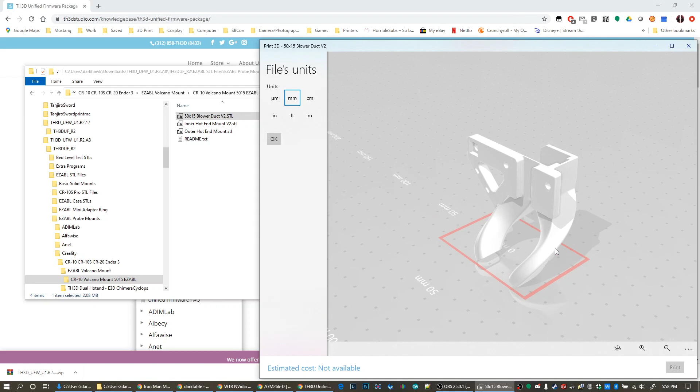So if you extract this and take a look at it, Volcano mount. So here, and I'll just open this up for a second and you'll see. So that should look familiar. That should be the blower duct for it. And you get the idea. So you could print these files out real easily and quickly.

And if you didn't use the Volcano mount and you use the regular mount, there's an OEM mount that's used with the regular 3D printer head for the CR10, or you can use the E3D V6 mount or the E3D V6 clone. So they're there if you wanted to use them.

All right, so now we'll go back to the main folder, open firmware Windows. So here we open up Arduino. Just allow access, it's just the Arduino stuff. So here we are again, we'll maximize it. The print's really big, so I'm going to go to Preferences, change this back down to 14, click OK.

Now we go to Configuration, and we scroll back down to Creality. So CR10S, because that's what I have, so I have an S5, so I uncomment that. If I go to the Volcano mount and uncomment that, so I'm going to leave all those alone, and now I'm just going to scroll down. We have to get past all the printer stuff. So now we're past the printer.

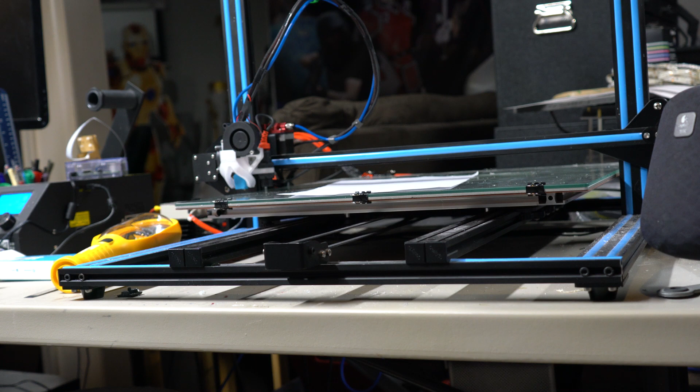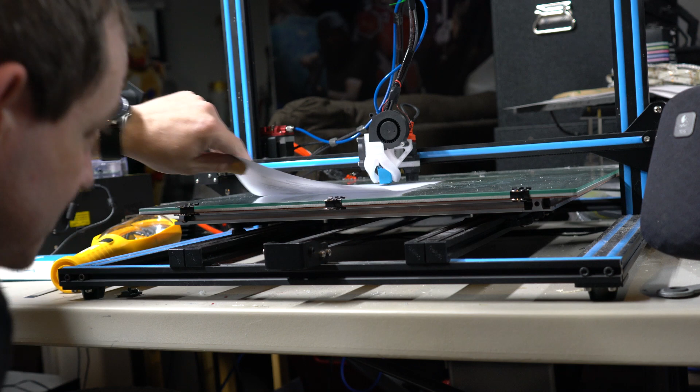Next thing you do, you home the Y. And then home Z. Now what you want to do is the printer, if you look, it says -5 or +5, so it's +5 too high right now, so you want to go down 5 millimeters. So I'm going to adjust it down to be 0. And in this case, my printer isn't really catching, it's not quite set up right. So this should technically be basically catching right on the printer.

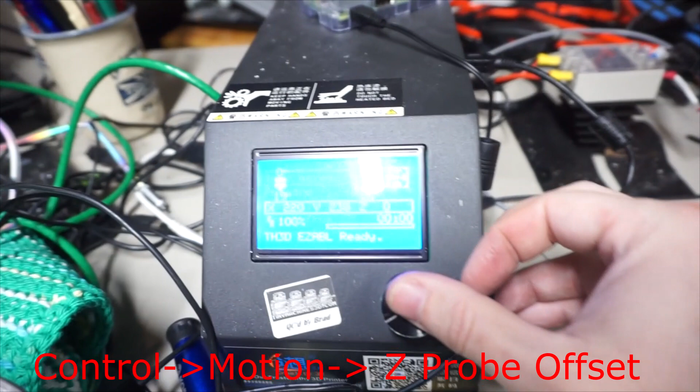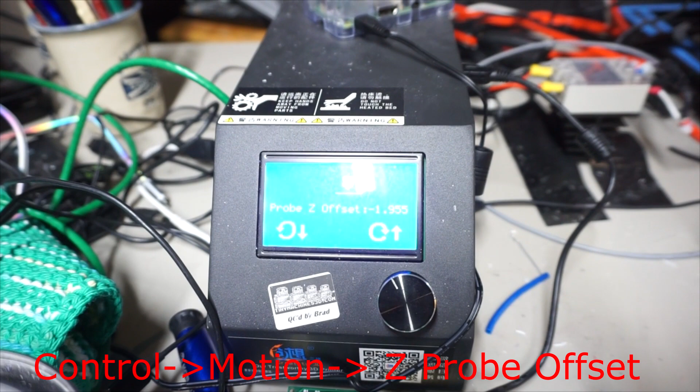So if I go to Control, go down to Motion, go to Z probe offset. Here it's set to minus 1.955. So if I go down just a little bit more, and now if I go over and look at my paper, it's still not catching really, so I'm going to go down just a little bit further. And you can see it's starting to catch. I can feel it. There's a little bit of resistance on the paper.

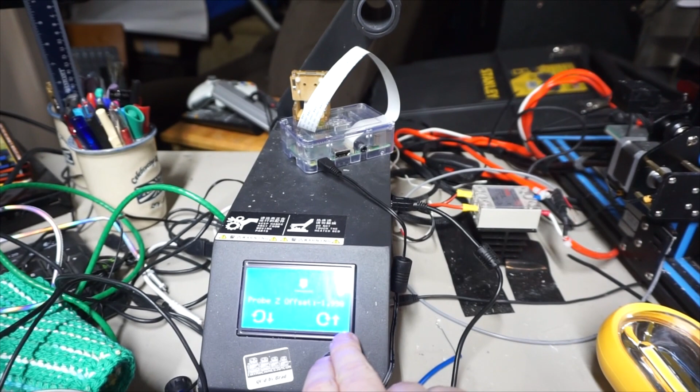So I'm going to just go down one more to make it 2. Hit OK. And then go back up to Control. And then I'm going to go down to Store Settings. So that stores that setting, and it'll remember that it was at minus 2. So I can pull this out now.

And now the next thing I'm going to do, I'm going to send it a command to make it actually do the bed leveling. So I'm going to do G29, and it's going to go through, and you'll see it leveling the bed. So it's going to probe at each one of the places throughout the bed. And remember, I did a 5x5 grid, so it's going to probe 25 places. Each place it probes, it's going to probe it there twice, because one time it's quick, the second time it slows it down a little bit to be more accurate. Now we're halfway through.

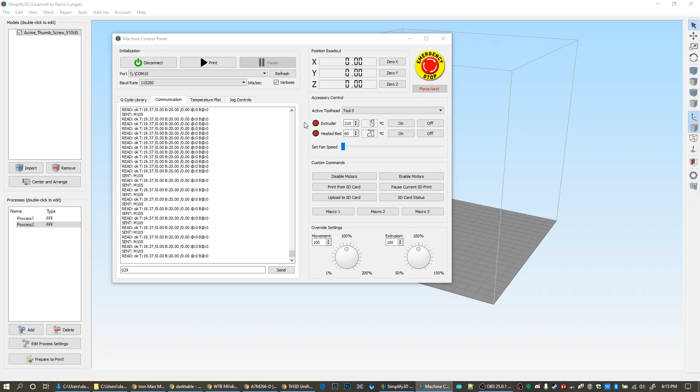So now that it's done, you can see that it went through and it saved what the settings were. So I'm going to copy and paste it into my text file. And then I'm going to go through and delete up to it, and then delete the rest of it. And so now that's my bed leveling. It gives you an idea of exactly how level the bed is. In this case, mine's about 1.5 millimeters difference from one side to the other.

Not incredibly level, but the thing to keep in mind here is that I have solid bed mounts, and I'd rather have solid bed mounts, because for me, I don't want the bed moving back and forth, or changing adjustment while it's running. That's one of the reasons I got rid of the springs, because I just don't like that setup. Anyway, the printer will adjust for how off it is. That's only 1.5 millimeters. Honestly, that's not a whole lot, given the fact that you're talking about a bed that is 500 millimeters by 500 millimeters.

Okay. So at this point, everything's set up and ready to go. You've got the printer set up and ready to go. The only thing you haven't really done is made sure that it heats up and works well from that standpoint. So one way to do that is you can use your software and tell it to heat up. So I turned on the hot end, and it's going to 210 degrees right now. And you can see that the hot end is now going up in temperature.

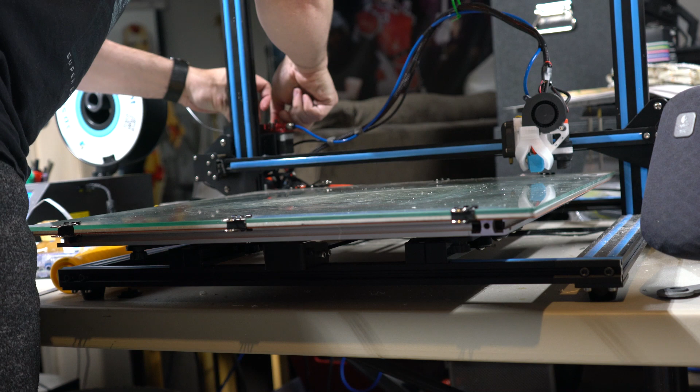Feed that into the printer. It always has problems going into the Bowden tube. I'm gonna feed all this into my printer. Make sure that that is nice and good. My printer is now up at 210 degrees, roughly speaking. Actually, I really need to make that be a little less severe. So, let's see if I can get this to feed in anymore.

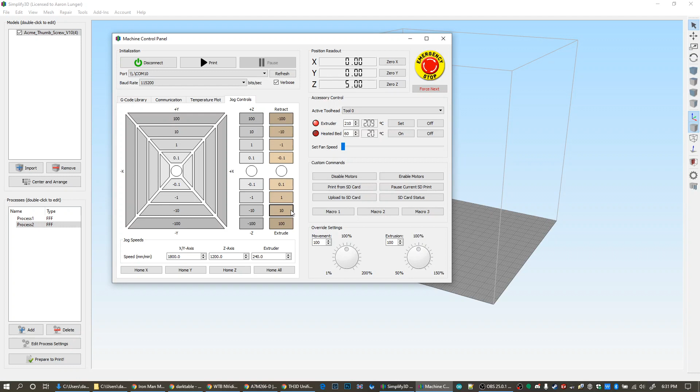I'm gonna actually raise the printer 10 more millimeters. And I'm gonna keep feeding in, and you can see that filament is now coming out of the printer. I'd say that's working fairly well. So I'm gonna turn the hot end off for right this second. And if I look at the temperature plot, you can see that the set temperature went down and the hot end is slowly going to decrease in temperature.

Alright, so I'm going to remove that print and I'm going to go to import another calibration block, and load that in. So the first thing you're also going to want to do is in your software, you're going to want to make sure that, and I'm going to remove that little bit of plastic.

You're going to want to make sure that your software has been updated to recognize that it's now at a 0.8 millimeter nozzle. So you can see here my nozzle diameter is 0.8 millimeters. Ignore the rest of the stuff. This is just the setup that I use. Your settings may be very different.

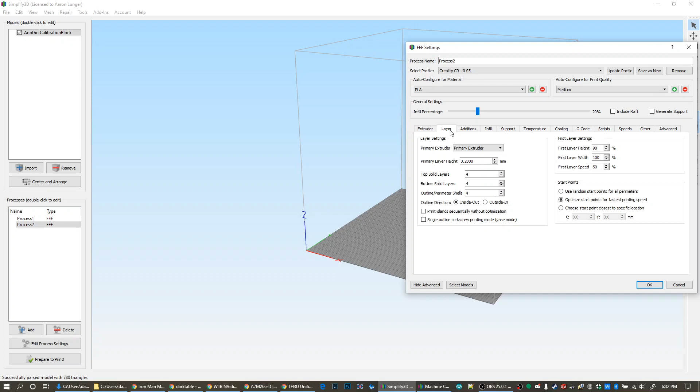Click OK. I'm going to also leave the layer at 0.2, click prepare to print. And it says it's going to take 20 minutes. So I'm going to hit begin printing.

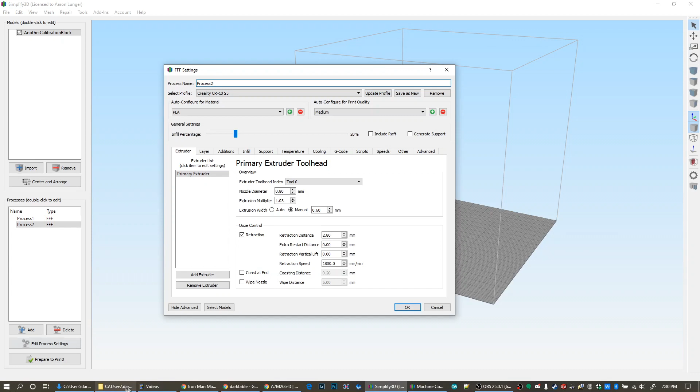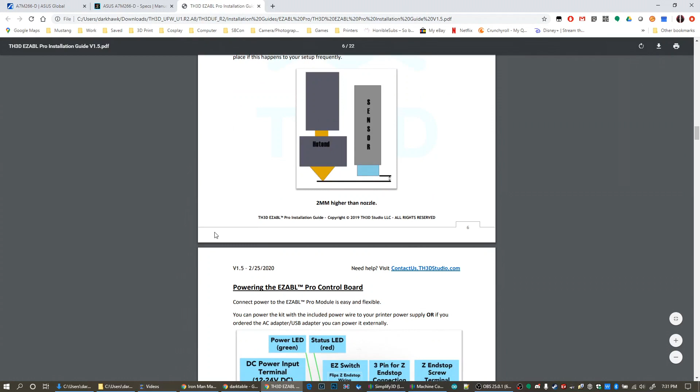So one of the things that we need to go over is your software settings. So with this now, if we go and look at the installation guide and check out the EZABL, and we take a look at this. You can read through this entire document. It's good information, good knowledge. You can see more about what we talked about. You can see that it says 2 millimeters higher than the nozzle.

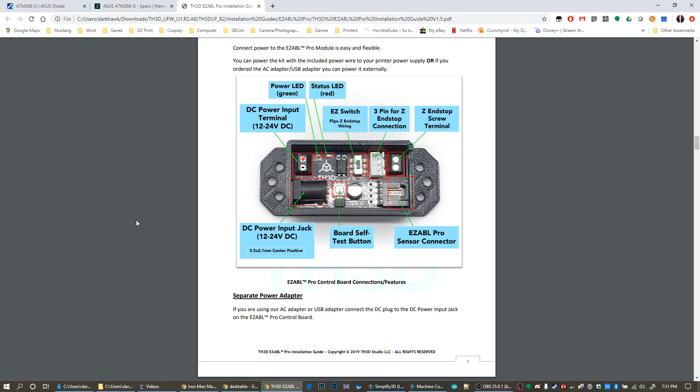Here's a pinout for how to connect everything and such. You may have to play with the end stop switch to flip the wiring and such. Just play with it a little bit. I had mine set up properly before I went through it. But when you go through all this, one of the things you have to do is your G code for the printer.

So actually in the folder there's something called starting G code. So this is very simple coding. There's little bits that you may or may not want to do. You know, this should work relatively well for the CR10 S5 or any of the CR10s or even the Enders and such. With that being said, go through, take a look at it, get an understanding of what everything does.

Things like the M117 code that you see here, all that does is write text out on the display screen. So you don't necessarily need to have that. Me personally, if I go and actually look at my starting code and my scripts, you see I just have an M75. Then I set the temperature for the extruder. I tell it to wait until the extruder gets to that temperature. Then I reset the extruder number.

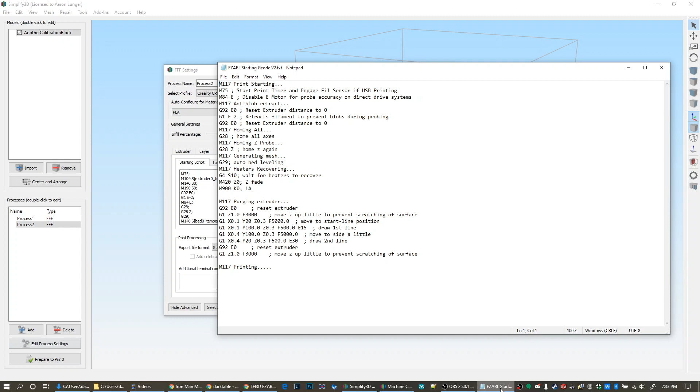Let's see, M84. I really don't know what the M84 does. Oh, disables the motor. So that disables your extruder motor. G28 is what does the homing of all the axes, and then if you do a G28 Z, that homes just the Z axis. G29 is the auto bed leveling. One of the things that I should really add in here is the M190 command.

And all this does is make it wait until the bed gets to the proper temperature before starting to print. So that's the M190. The G4 S10 just tells it to wait a little bit. The G92 resets the extruder value. And then the G1s make it print a single line at the front edge of the printer. G92 resets the extruder. And the G1 tells it to move 1 millimeter high. And then it starts printing.

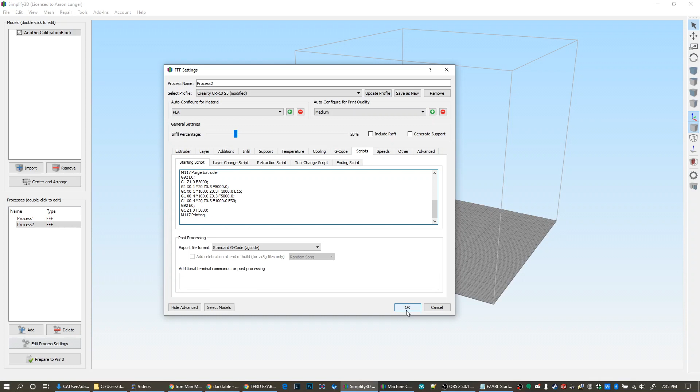And that's the start G code. The end G code, you don't have to worry about. It should be the same no matter what it is. And let this start printing.

In the meantime, this is gonna stop. So stop recording. Yay! I wonder where this saved the file. 896 megabytes. Alright, so I'm going to close this. No, I'm not going to close that. And I'm just going to let this go. We'll see what this print looks like. How much longer do I have?

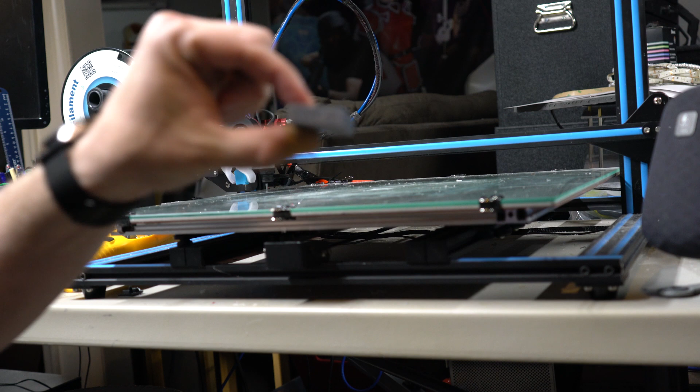And now that the printer's done printing, we remove the print. Not too bad. Decent layer to layer adhesion. Everything turned out pretty nice. Overall, a pretty decent print.

So there we have it. We've gone through, we've set up the printer, we've added in a new hot end, we've done the auto bed leveling, we've gone through how to set up your software to do it, we've gone through how to reprogram your 3D printer so that way your printer now recognizes the new bed leveler, it notices how the new extruder is going to work and the placement on your printer. And we've done a quick and simple test print that came out lovely.